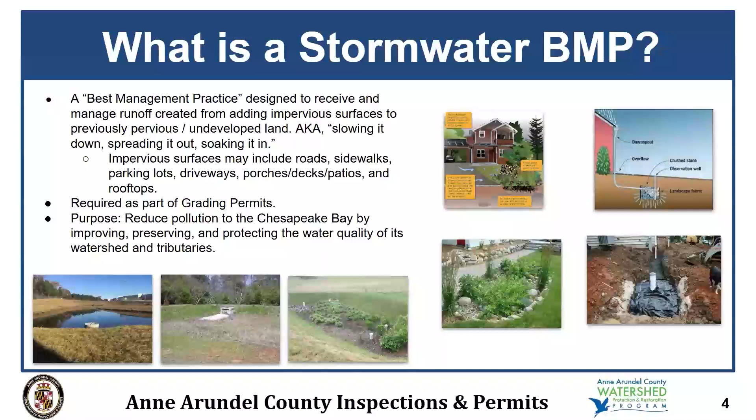If any of you live in a condo community where you're dealing with community-owned devices, you can also be talking about parking lots. These BMPs are required to be built under the grading permits for builders and developers. And the purpose is to reduce pollution to the bay by improving, preserving, and protecting the water quality of its watershed and tributaries.

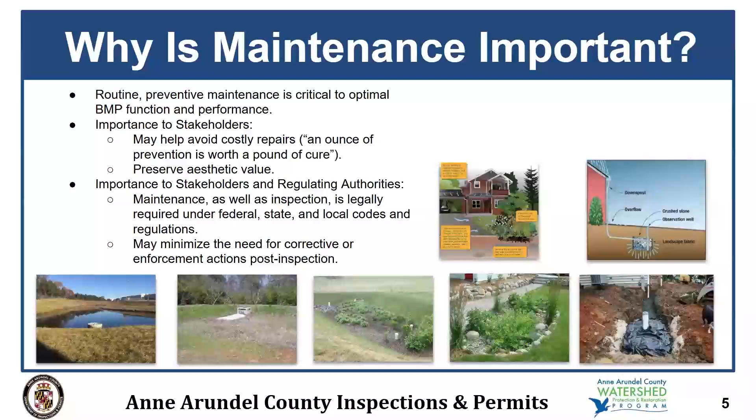Why is maintaining them important? Routine maintenance is critical to optimal BMP performance. It's important to stakeholders because it may help stakeholders avoid costly repairs in the future and may also help them preserve aesthetic values of their properties. It's important to both stakeholders and us regulating authorities because maintenance, along with inspections, are legally required under federal, state, and local codes and regulations, and it can help minimize the need for corrective or enforcement actions post-inspection.

Some tips for all of you, if you do have BMPs on your own property, or if you are part of an HOA that has some HOA-owned devices, or maybe both, it's a good idea to self-inspect them. You should inspect them after every rain event. This can help you identify any maintenance concerns, as well as assess how well the BMP is performing.

If a BMP isn't designed to have a permanent pool of water, it should be fully dry about 3 or 4 days post-rain event, unless it's a really intense storm. If it's designed to have a permanent pool of water, basically that water level has to drop back down to that normal depth within about that same time frame. It can help you identify minor issues before they become major concerns. It can help you prevent health and safety hazards, and it can also help you plan for costly repairs and upgrades in the future.

If any of you happen to be members of HOAs and you have some HOA-owned BMPs in your community, it's a good idea to keep 2 dedicated funds. One would be a routine fund for your annual maintenance costs, and the other one would be a non-routine fund where you're going to save money away for future structural or emergency repairs.

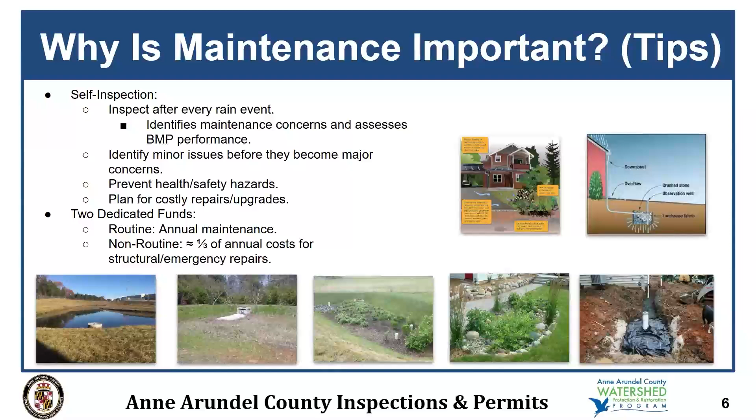So for tonight, we're not going to talk about all the different BMPs. We do inspect several types I'm not including on this slide, like ponds, constructed wetlands, sand filters, etc. We're really going to try to focus on just the BMPs that have really hit the scene since like the mid-2000s and onward. Some BMPs you can often see in HOA-owned spaces or even on private residences can include things like submerged gravel wetlands, which is a BMP that is designed to have a permanent pool of water.

You may see a rain garden in your yard, or maybe a planter box up against the side of your house. Maybe you have what's called a landscaped infiltration garden. These are really useful types of BMPs on lots with really sandy soil. Maybe your community has a microbioretention in one of its open spaces. A lot of people know about microbioretentions already. Or maybe you have a dry well on your property.

If it's larger, some of the older, larger dry wells for older properties are sometimes called infiltration trenches. These are basically stone-filled pits that are beneath the surface of your yard or your open space. And usually they're going to be landmarked with a cap sticking up out of the ground. You can see this one's kind of still under construction. You can see a downspout being connected into it. And you can see that cleanout that's going to stick up out of the ground once it's backfilled.

You'll see that 4 of these BMPs I have put in bold. That's because unlike submerged gravel wetlands or microbioretentions, you may often find these other 4 on residential private lots. Submerged gravel wetlands and microbioretentions usually are reserved for larger drainage areas, but from time to time you will find them on residential lots, just not that often.

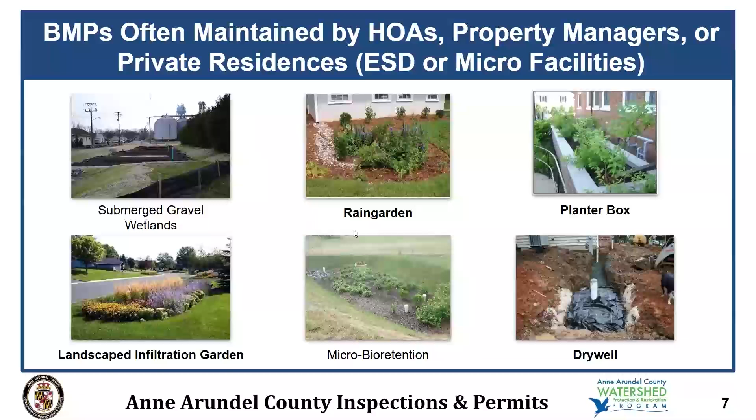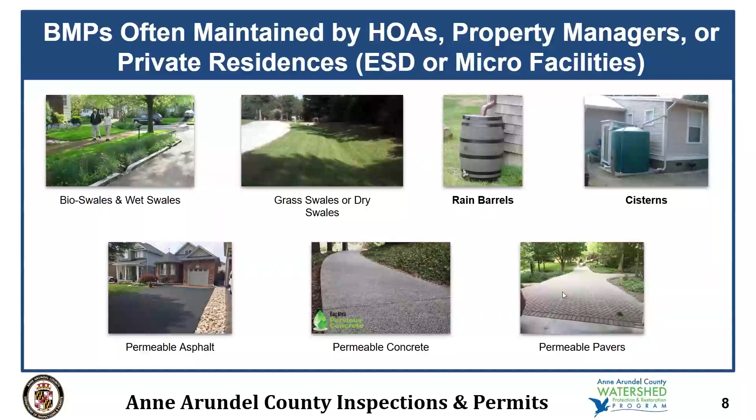Some other types you may find can include bioswales and wet swales, grass swales or dry swales. Maybe you have some rain barrels or cisterns that your downspouts are connected into. There's also a chance you may have permeable pavements for your driveway or for your sidewalk in your community. If you have permeable asphalt or concrete, it'll kind of have a popcorn-like texture look to it. Or you could have permeable pavers, which will be those bricks with those spaces in between.

How can you tell if there's a BMP on your own private lot? Some of these BMPs, like the rain garden, the planter box, rain barrels, permeable asphalts, etc., even if you don't already know that these are BMPs, you can probably at least tell they're on your property, right? They'll kind of stand out to you.

The more subtle ones are going to be those underground dry wells or infiltration trenches. The best way to know if you have one is if you happen to have some kind of clean out sticking up out of the ground in your yard, and you know that it's not associated with a septic clean out or a sewer service clean out. If you're on well, it's not anything to do with your well, or if you're on public water, it's nothing to do with your water. Chances are it's a clean out or an observation well, as we call it, for that dry well.

Another subtle way to tell is if any of your downspouts go into an underground pipe connection like this here. That's also usually a telltale sign. They don't always have this Y fitting on them like that. Sometimes it's just a straight connection straight down. You may find these also being used to help direct downspouts under the ground and into something like a rain garden that's further away from a home. But oftentimes, if you have this on your house, there's a strong chance that you may have a dry well.

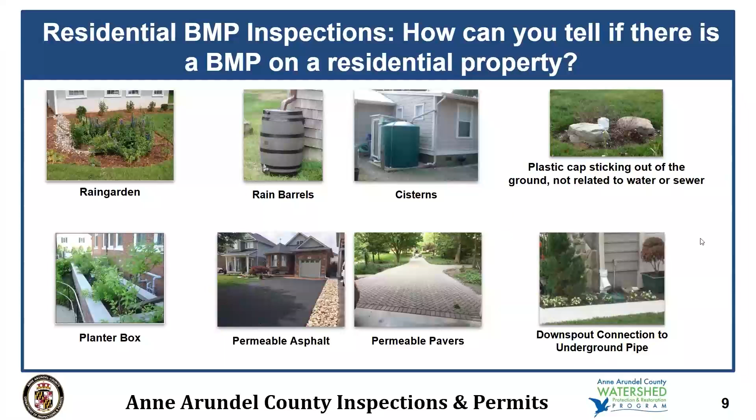All right. So who is responsible for maintaining the BMPs, and what are inspection and maintenance agreements? Private inspection and maintenance agreements, or I&Ms, sometimes they may be called stormwater management agreements, or SWMAs. These are legally binding documents made by and between a permittee and the county as part of the grading permit application process. Once they get completed, they are recorded at Maryland Land Records, and they establish that a property owner is responsible for maintaining the BMPs on their property.

They may not alter the BMPs without prior approval. The BMPs must be made accessible for inspection upon the county's request at all reasonable times. And they will bind and run with the land as a covenant once they have been recorded. In other words, it's going to be inherited by each subsequent owner in perpetuity. Usually these are going to be recorded by and between the original builder or developer and the county. And from there, as they sell the property or sell the subdivided properties, each subsequent owner or owners are going to inherit that from there on in.

So the triennial maintenance inspections. What is a triennial maintenance inspection? These are maintenance inspections that are performed to ensure that required permanent BMPs are still in place, that they are well maintained, and that they are still performing as designed. Every BMP in Anne Arundel County has to be inspected at least once every 3 years, and we are required to do these inspections under our MS4 permit. The current permit reporting period will end on November 4th of next year.

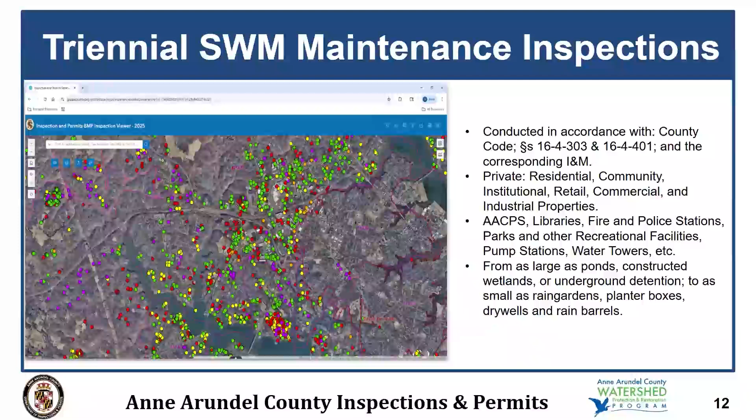We do these inspections on private properties, so that can be residential lots, community-owned spaces, institutional-owned properties, such as places of worship or museums, retail properties, commercial and industrial. We also do the inspections on BMPs on several of the public or quasi-public departments' properties. And it can be anything as large as a pond down to something as small as a rain garden or a rain barrel.

When we do an inspection, there are 3 possible results. The first result would be a pass. This means that we found no issues during our inspection, or we may have seen something that is so minor that it did not warrant any kind of follow-up, and we'll just inform whoever owns that BMP that they need to monitor that particular observation.

The next is pass needs maintenance. This means that the BMP, all it really needs is some general upkeep. It may be having some minor functional issues, but they can be resolved by performing that routine maintenance.

And then there's fail. A fail would mean that there are major issues requiring structural repairs. It would basically mean that you would need to bring in a piece of construction equipment to fix it. This cannot be resolved with just general maintenance. And this can even include things like some people have removed things like their rain gardens or their planter boxes.

There is no real difference from an enforcement standpoint between the pass needs maintenance or a fail. In other words, there's no real difference in the sense of urgency. The only time something becomes more urgent is if it poses a health or safety hazard. And even some of those can at times be resolved just by doing general maintenance.

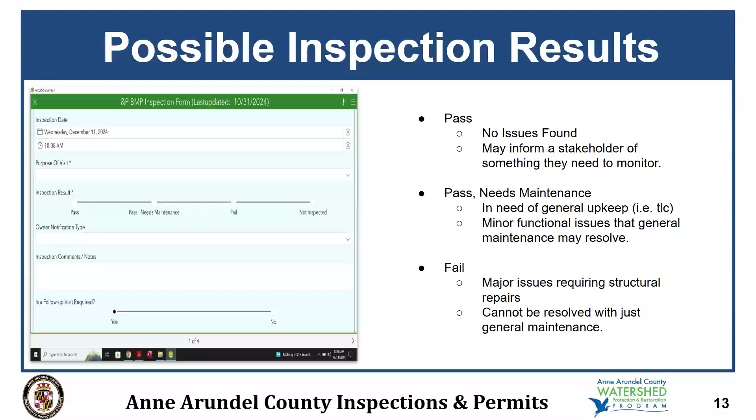So this is a rating system we use for the purpose of reporting our inspections to the state. But in regards to how we interact with you as our constituents, it doesn't really change anything.

So some examples of what it looks like if a BMP passes but needs maintenance. You might notice that you have some standing water. Could be due to sediment accumulation on the surface of a BMP. Maybe the BMP has an underdrain that has somehow been blocked or clogged and needs to be snaked out. Maybe you have a rain garden or a micro-bioretention or a planter box and you've recently remulched, but you used the wrong kind of mulch.

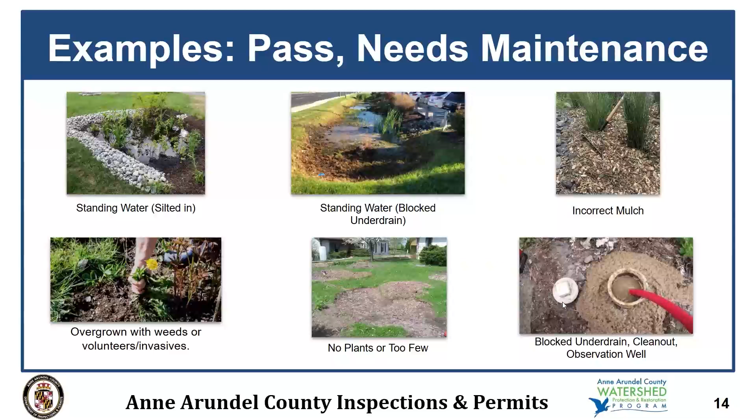We do not want to see things like cedar chips or hardwood chips, wood chips in these micro-bioretentions or these rain gardens. Maybe it's become overgrown with weeds or invasives rather than Maryland native species. Maybe there's no plants in the facility. Or again, maybe there's some kind of blockage or clog in the underdrain or a cleanout or an observation well.

Some further examples: if you have a dry well and you have one of those observation well caps or cleanout caps, if it somehow got broken because it's been hit by a lawnmower or something like that, you need to repair or replace it right away. We want to make sure that no sediment or debris gets down inside of that pipe. We have to be able to locate those caps so that we can actually perform our inspection.

Basically, to inspect a dry well, we're going to open that cap and take a look inside. If it's been a few days since it rained, we shouldn't see any water. If it just recently rained, you would expect to see water inside of this pipe underneath this cap. It's not uncommon to find people have buried them or done something with them where we can't readily find them. It really helps to try to make sure that these are landmarked out so we can locate them very easily and proceed with the inspection.

We're also going to look for things like downspouts. We want to make sure they're not clogged. We want to make sure that they're not disconnected from the ground connector. We want to make sure they're not disconnected from the roof gutter either.

If you have a required rain barrel, you are supposed to empty them every winter and put them in storage for the winter. If you don't, it's not uncommon to find that over time they will become broken or cracked. Sometimes people will forget to put them back or they don't realize that they're supposed to be sort of like a long-term feature, at least through the spring and into the fall. If you have those larger cisterns, though, those cisterns are usually more durable and you usually don't have to put them away into storage.

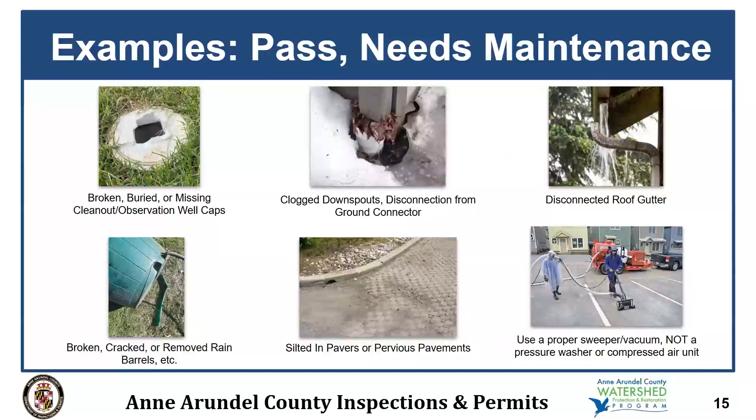Some examples of compliance regarding landscaping. Basically, we want to see 85% coverage of the BMP's surface area at mature growth of the vegetation. Also, when it comes to mulch, we want to see non-dyed, double shredded, or triple shredded hardwood. We have had some feedback from some landscape contractors where they've basically been saying that they prefer the double shredded. It seems to be a more practical material rather than the triple shredded.

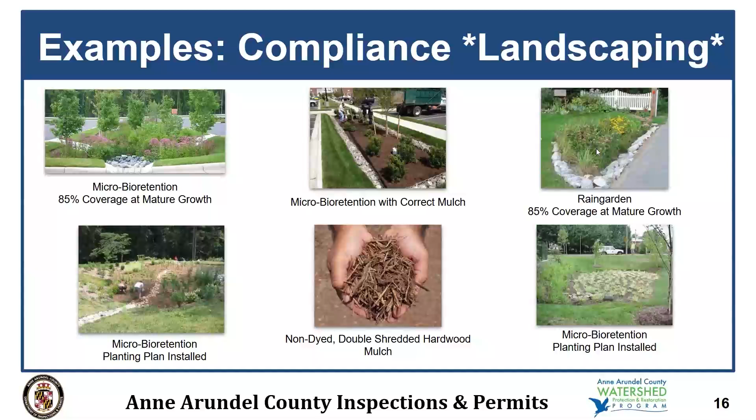There is also the option, instead of mulch, to use light colored stone that's 3/4 of an inch to 2 inches in size. If you would like to do that, that may be an upfront cost, but obviously you're not going to have to remulch every year at that point. And another option is you can try to plant it densely enough, like you see here with this rain garden, that you get to a point where maybe you don't even have to remulch every year if you would still prefer to use mulch instead of stone.

So some examples of a fail. If a BMP is holding water longer than 72 hours, that generally means there's something really wrong with it. If there's an underdrain, maybe the underdrain has at this point become crushed somehow beneath the surface. So you want to take a look at that.

There have been cases where BMPs have been encroached on or removed when people have put on additions or decks, patios, pools. And we've also had instances where people have filled in or removed BMPs, like their rain gardens or their planter boxes, because they wanted more yard space or something like that.

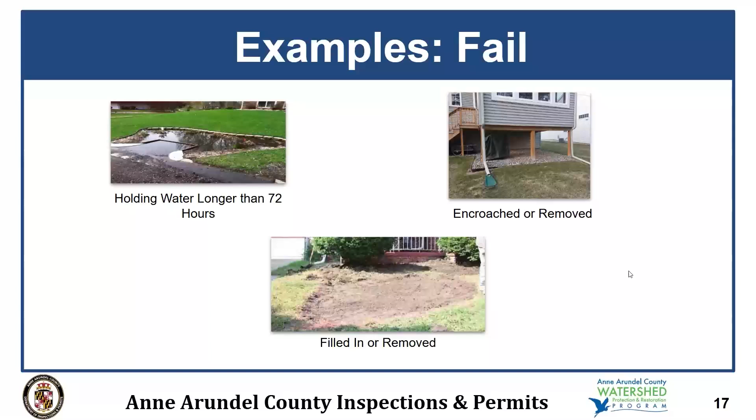All right. This is where I'm really getting into the topic I really want to talk with all of you tonight about, the residential BMP inspections. So we do have to do inspections on private residential lots. Currently, we do not schedule these inspections unless a homeowner already knows that they have a BMP and knows when it's due for an inspection, and they reach out to us first. These inspections are conducted at random.

Our inspectors will knock on your front door when they arrive to your property and announce their presence, and they'll request access to your BMPs. If you are home and you answer the door and it's an inconvenient time for you, you are more than welcome to ask them to return at a later date and time that you can schedule with them.

But just so you're all well aware, our inspectors do not need to come inside of your home. They do not need to get onto your roof or anything like that. They only need access to the areas of your property that the BMPs are located at, and they only need to do it at ground level. When they have completed an inspection, our inspectors can either notify you by coming back to your door, or if you want, they can just leave you a notice of inspection door hanger to advise that it was completed.

Something I forgot to mention was you don't need to join the inspector for the inspection if you don't want. You're more than welcome to. We have plenty of people that do like to talk with our inspectors as they proceed with an inspection. And basically, they're going to fill out this door hanger. They can circle pass if a BMP passes. They can circle needs maintenance if it fails or needs maintenance. And they'll fill in some other information, including what types of devices they were inspecting.

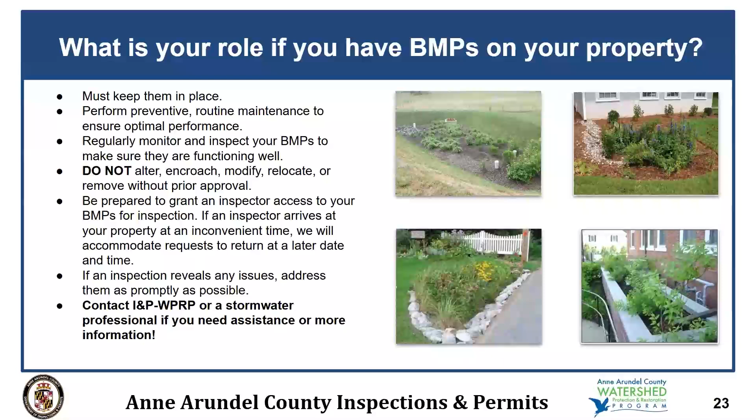Also, if you have a BMP on your property, you are eligible for at least one or more credits. If you have a BMP that was required to be built on your property under a grading permit, you are eligible for the Watershed Protection Restoration Fee credit. If you have a self-installed BMP, you are eligible for not just that credit, but also the Stormwater Property Tax credit. The WPRF credit is something that is programmed by our Bureau of Watershed Protection, and the Stormwater Property Tax credit is something handled by our tax division.

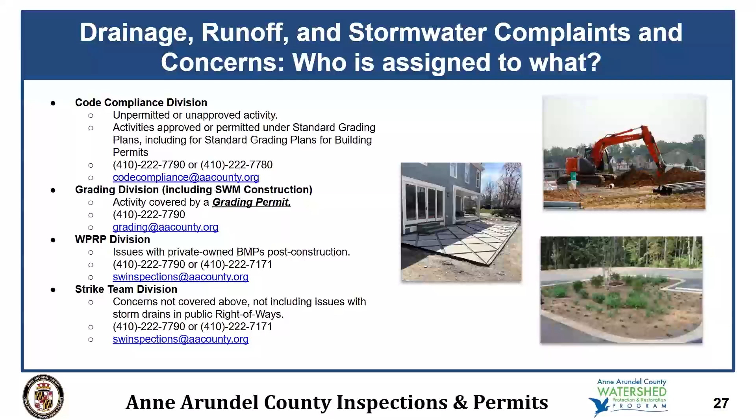And then we have our strike team division. They're going to address any concerns not covered above, with the exception of any issues involving storm drains in the public right-of-ways. They're also the group that takes a look into concerns with development and its impacts to downstream properties. If you have a runoff issue involving public storm drains inside the county right-of-way, you're going to want to call the Road Operations Division and Bureau of Highways over in DPW.

Now, if you have any issues with stormwater BMPs that are receiving runoff from the county right-of-way, such as a stormwater management pond in a neighborhood with public roads, that's more than likely going to be our Stormwater Infrastructure Programs Division over in DPW. You'll want to give them a call at extension 4240, and you can ask to speak with SIP. They will also look into concerns forwarded to them from road operations when the public storm drains are either too far outside the county right-of-way or the issue with the public drainage system is beyond road operations capabilities. Situations where maybe we have to look at regrading a road or retrofitting a public stormwater pond, things like that.

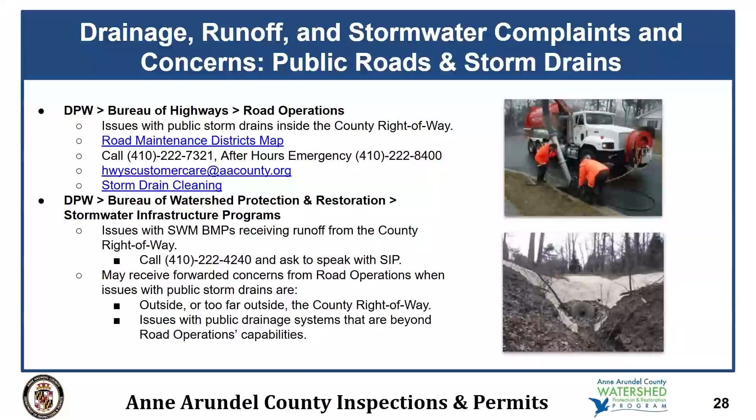So drainage, runoff, and stormwater issues between neighbors are a civil issue. It's not uncommon for us to receive concerns or complaints about neighbors and the directions in which they point their downspouts or their sump pumps. Maybe they've constructed a patio and that's somehow creating runoff for a downhill neighbor. Unfortunately, unless there is a violation taking place, we can't really take enforcement action in a lot of these situations.

To help you guys out, an example of a code violation, if you're experiencing something like this, would be disconnecting a downspout from a required BMP. It is also a violation to drain a sump pump into a required BMP. So if you have a rain garden or a dry well that your downspouts are connected into, please do not connect your sump pump into that downspout or into the pipe that drains that downspout to those BMPs. When you do that, it can oversaturate those BMPs.

Now, if you want to do a little French drain right next to where your sump pump comes out and you want to connect it into its own little French drain, that's fine. Another example of a violation would be discharging sump pumps or regular downspouts, basically downspouts that aren't required to go into a BMP, within 5 feet of the nearest adjoining property line.

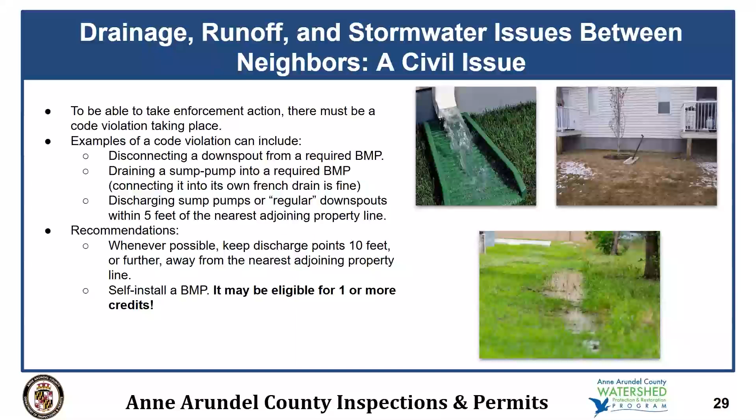We would recommend, whenever possible, keeping those discharge points at least 10 feet away, just in the interest of trying our best to be good neighbors with each other, be good stewards for our community together. Another recommendation is you could self-install a BMP on your own. And again, if you remember those couple slides back, that may make you eligible for one or more credits.

Now, having said all that, anytime you have a stormwater issue, you are more than welcome to call us. You guys are our taxpayers. You pay our salaries. You are our customers. You are our constituents. You are our community members. We want to provide you with excellent service. It is not your job to determine if something is a violation or not. That is our job. So anytime you do have a concern, please feel free to call us.

Another option, if you're experiencing drainage issues and you want to look to improve stormwater management on your own property and you kind of feel like you need some assistance, please feel free to call our Education and Outreach Coordinator, Sally Albright, with the Bureau of Watershed Protection. She's absolutely wonderful. She is very passionate about the work she does and about educating our constituents on stormwater. Very environmentally directed mind. She is absolutely wonderful to work with. You can contact her and ask her to schedule a site visit with you.

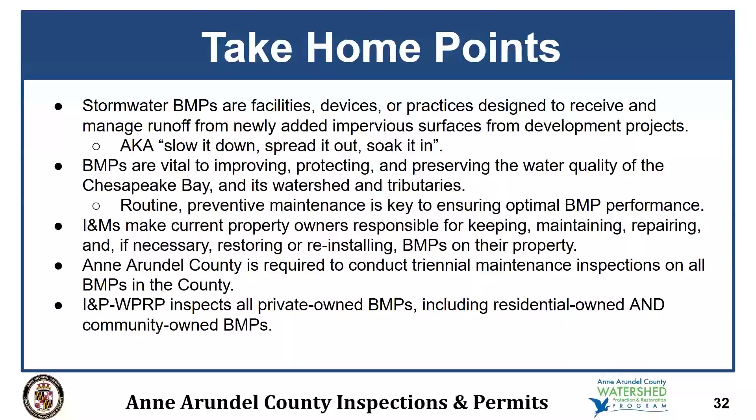Inspection and maintenance agreements make current property owners responsible for keeping, maintaining, repairing, and, if necessary, restoring or reinstalling BMPs on their property. Anne Arundel County is required to conduct triennial inspections on all BMPs in the county. And the WPRP division inspects all the private-owned BMPs, including residential-owned and community-owned. Triennial inspections that reveal issues can result in a correction notice. Please remember, a response is better than no response.

We are taking steps to ensure BMP access, maintenance, and upkeep is more effective and practical, particularly for homeowners, residents, and HOAs. The county is looking to raise more awareness about triennial inspections, particularly for residential properties. If you have a runoff concern, your assistance in identifying the cause can help us address the issue as promptly as possible by getting you to the right division.

Your role as a resident, if you happen to have a BMP on your property, is to keep it and maintain it and make it accessible for inspection upon request. Please do not be afraid to contact us for assistance with maintenance. And if you observe a drainage or runoff issue, please report it. See something, say something.

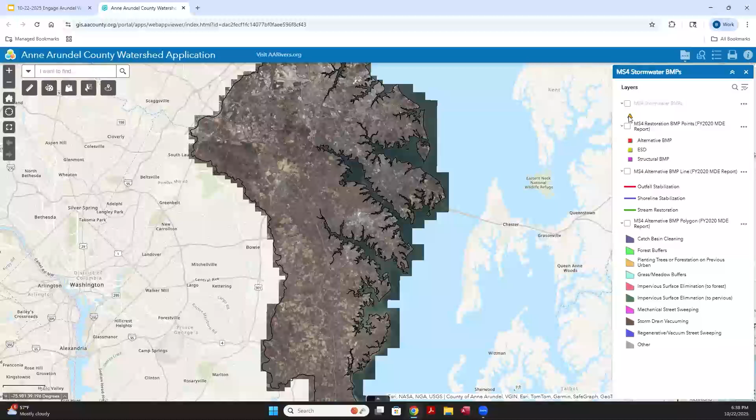You can go up here to the right-hand corner. You'll see a little folder looking icon here. You select that. Go down to this layer right here, MS4 Stormwater BMPs. You can select that. And right here, you can select MS4 Stormwater BMPs. You'll see it's a little orange triangle. And once you zoom in close enough, you'll see those little triangles sprinkled throughout.

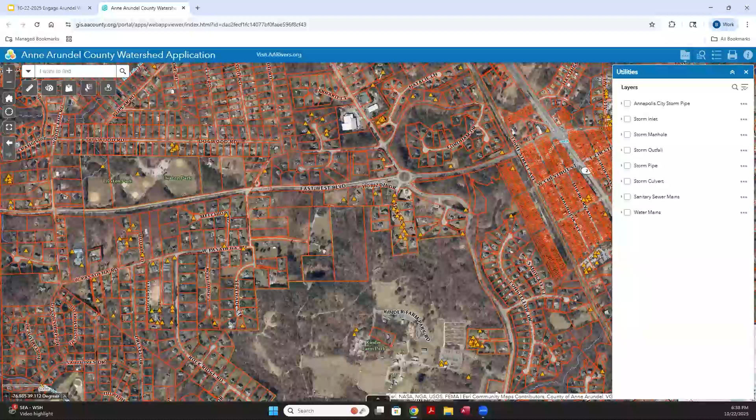You can also use this viewer to turn on, if you would like, some storm drain layers. We do have the county-owned storm drains in this application, as well as some of the Annapolis City storm pipes. There is another viewer that I've abbreviated in calling the utility viewer. You can use this viewer to view not only the county storm drains, but once you zoom in close enough, you can also use it.

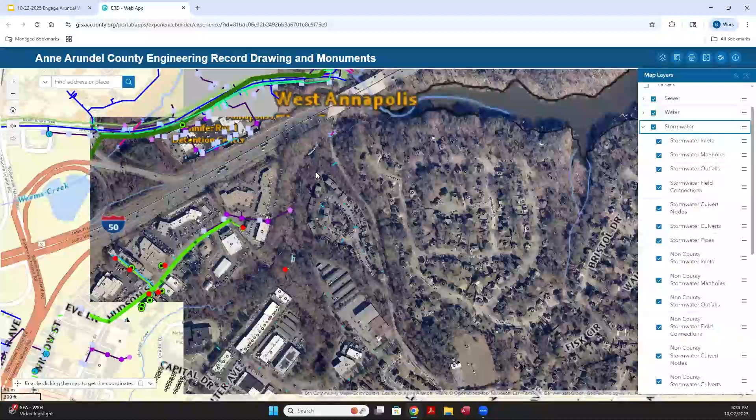You'll see down here, there are layers labeled non-county. So if you live in a community with private storm drains, they may, not always, but they may be mapped in, and you may be able to view them on this viewer. You can see them. An example would be right here by the hospital. You can see the non-county storm drains are colored in gray here.

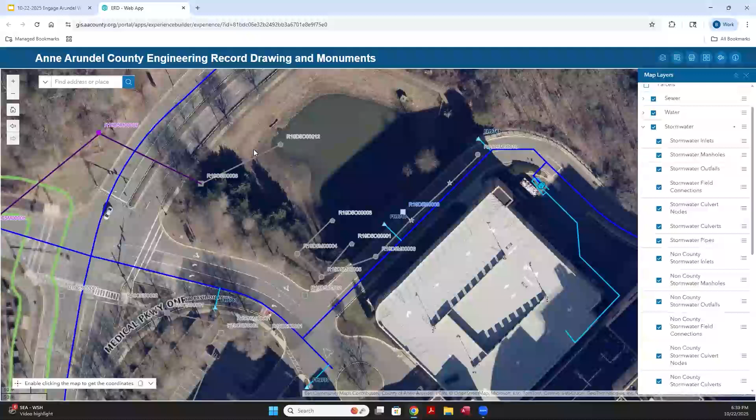And finally, some additional resources. If you're ever looking for assistance, there are two groups of stormwater professionals that you can try contacting. One of them is the Chesapeake Conservation Landscaping Council. They issue what's called the Chesapeake Bay Landscape Professional Certification. They keep a directory of their certified professionals.

Another option, want to mention them again, is the Anne Arundel Watershed Stewards Academy. I have a link to their main page as well as a link to contact one of their stewards. Again, there's residential site assessments. I've included links to their lists of contractors and vendors that they've worked with or that they know are present here in the county. I've also included a link to their stormwater success course. This is a really informative course, particularly for HOA and residential owned BMPs.

It's the result of a lot of hard work from a few different people in the Watershed Stewards Academy, particularly Jeffrey Pop and Stephen Miller. Jeffrey Pop is one of their staff members, and Stephen Miller is a master steward with a lot of experience. They actually presented at this year's Community Association Summit, and I've included a link to the video presentation of that right here.

We're hoping this upcoming Community Association Summit to maybe include a portion where they host a field day where I will actually be the one leading basically a field inspection for people to observe how we do these inspections. The Watershed Stewards Academy, again, can't say enough good things about them. They're a really good partner for the county, and if ever you want to learn more about stormwater and what you can do on your own property, they're a great tool out there for you to utilize.

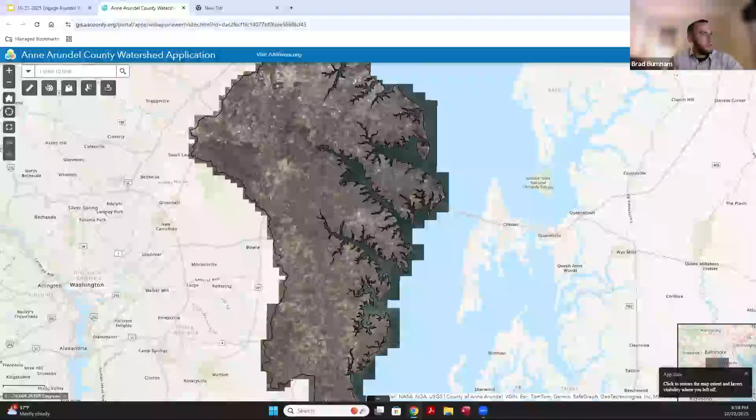That watershed viewer, James, is it okay if I share my screen again real quick? Yeah, so that watershed viewer that I showed you guys all before, once you turn that BMP layer on, you zoom into a BMP, you click on it. When you click on it, you'll see this little information window pop up. It'll tell you what permit number it was built under, what type of BMP it is. It'll tell you who's responsible for the maintenance, and you can find the link for the maintenance information.

It does not include inspection information, unfortunately. So again, even that's not housed here. So if you want to know about your community's actual inspection result, you can reach out to me directly, and I'm happy to provide you that information.

All right. And then will you provide a report if an HOA or homeowner passes, or do they only get a letter from you if they fail or need maintenance? We usually will only send you a report if it failed or needs maintenance. We are happy to write reports saying that everything passed. We actually have some vacancies in our division currently. Our inspectors have to each inspect at least 1,000 to 1,200 BMPs a year.

So whenever possible, we try to focus on getting through those inspections. But we're happy to write a compliance report for an initial inspection if you request it. We're happy to do that. Again, with the residential side, we've been trying to use those door hangers in place of having to write up a whole report if something passed an inspection.